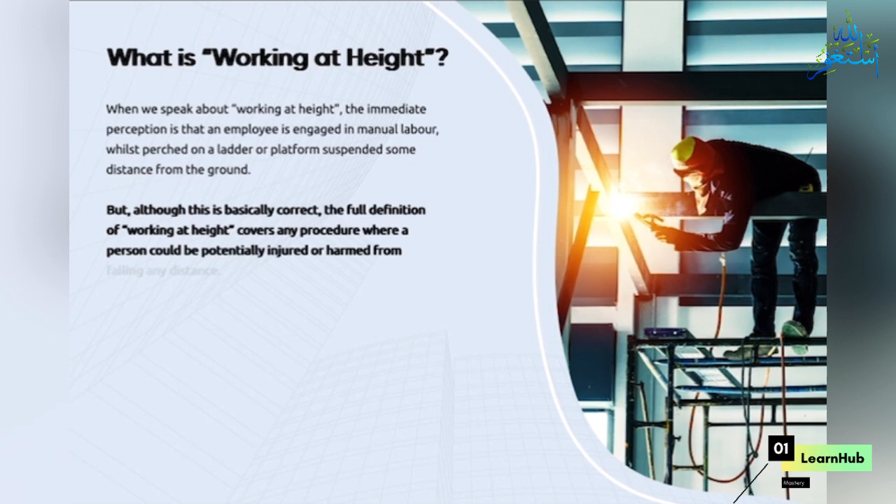What is working at height? When we speak about working at height, the immediate perception is that an employee is engaged in manual labour whilst perched on a ladder or platform suspended some distance from the ground.

But although this is basically correct, the full definition of working at height covers any procedure where a person could be potentially injured or harmed from falling any distance.

This can even apply to tasks set at ground or below ground level if there is sufficient distance for a body to fall and impact upon a hard surface.

Therefore, work in a large underground space can still be as dangerous to employees as tasks set outside high buildings or on roofing.

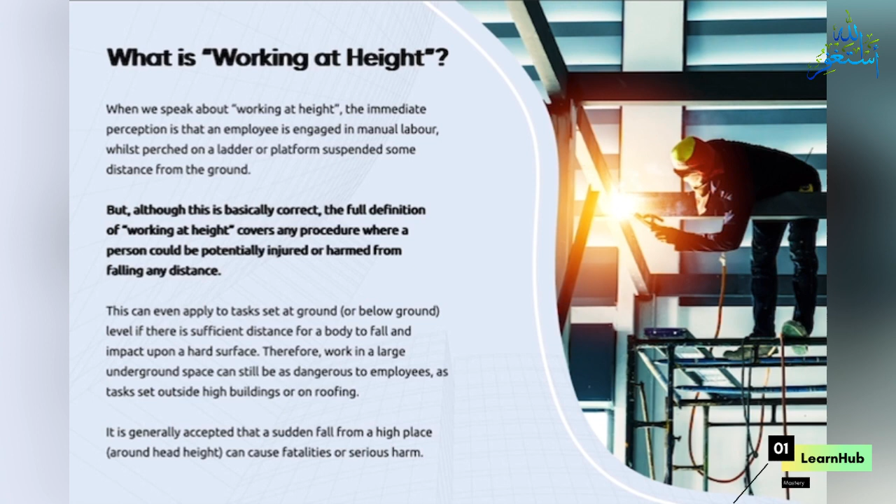It is generally accepted that a sudden fall from a high place around head height can cause fatalities or serious harm.

Examples of working at height.

There are plenty of traditional and non-traditional jobs that will entail working from a height. These will generally involve an individual performing manual tasks whilst positioned on trestles or scaffolding, flat roofing, ladders or cherry pickers, formwork or temporary building constructions, ground level close to a pit or excavation, or at any level close to fragile material that may collapse.

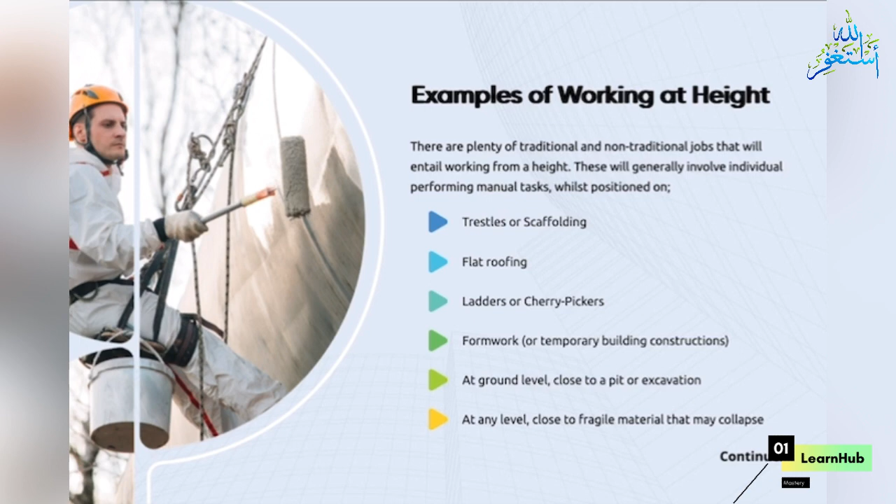Examples of working at height.

Trades and occupations may also include this kind of work, such as window cleaners, builders and construction workers, decorators and maintenance workers, shelf stackers at factories or shops, packers at warehouses, and firefighters.

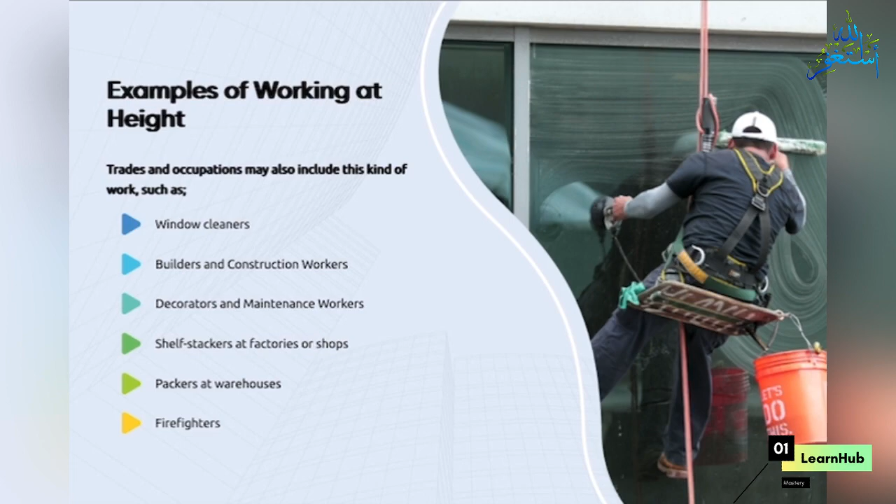Risks from working at height.

According to the most recent statistics from HSE, Health and Safety Executive, and RIDDOR, Reporting of Injuries, Diseases and Dangerous Occurrences Regulations, the most common cause for fatalities at the workplace in the UK is a fall from a height.

Over a quarter of fatal injuries to workers during the last 5 years were caused specifically by this type of accident, with 26% tragically dying due to injuries sustained. This is an average of 37 fatal injuries per year, and many of them were due to avoidable situations.

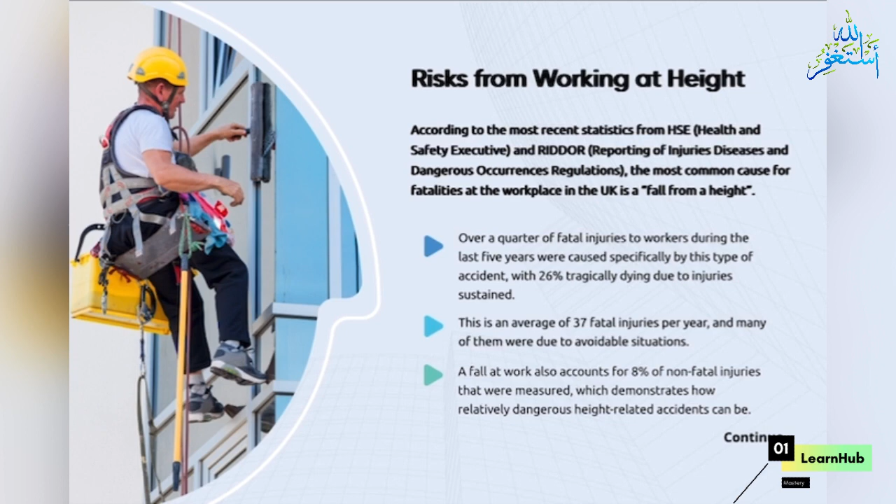A fall at work also accounts for 8% of non-fatal injuries that were measured, which demonstrates how relatively dangerous height-related accidents can be.

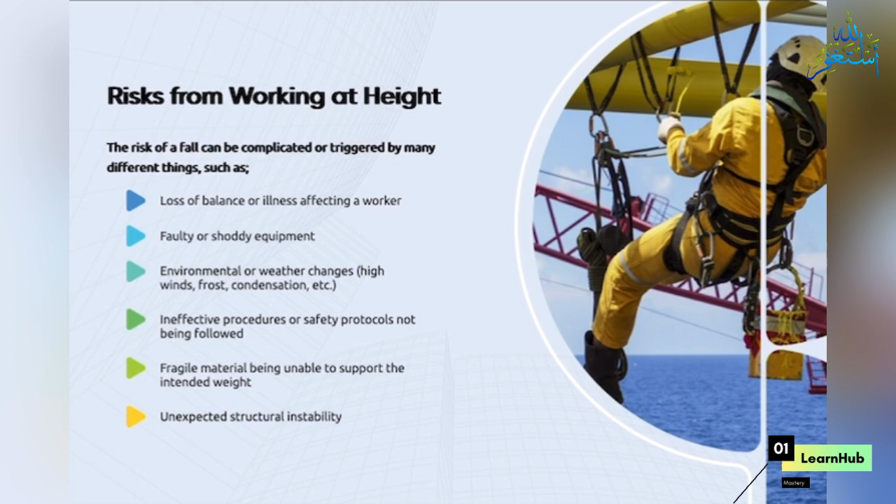The risk of a fall can be complicated or triggered by many different things, such as loss of balance or illness affecting a worker, faulty or shoddy equipment, environmental or weather changes like high winds, frost, condensation, etc., ineffective procedures or safety protocols not being followed, fragile material being unable to support the intended weight, and unexpected structural instability.

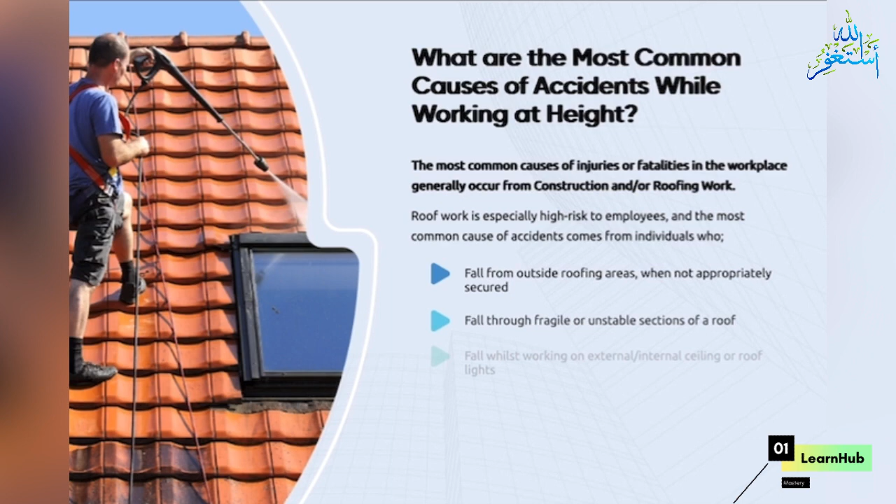What are the most common causes of accidents while working at height? The most common causes of injuries or fatalities in the workplace generally occur from construction and/or roofing work.

Roof work is especially high risk to employees, and the most common cause of accidents comes from individuals who fall from outside roofing areas when not appropriately secured, fall through fragile or unstable sections of a roof, or fall whilst working on external or internal ceiling or roof lights.

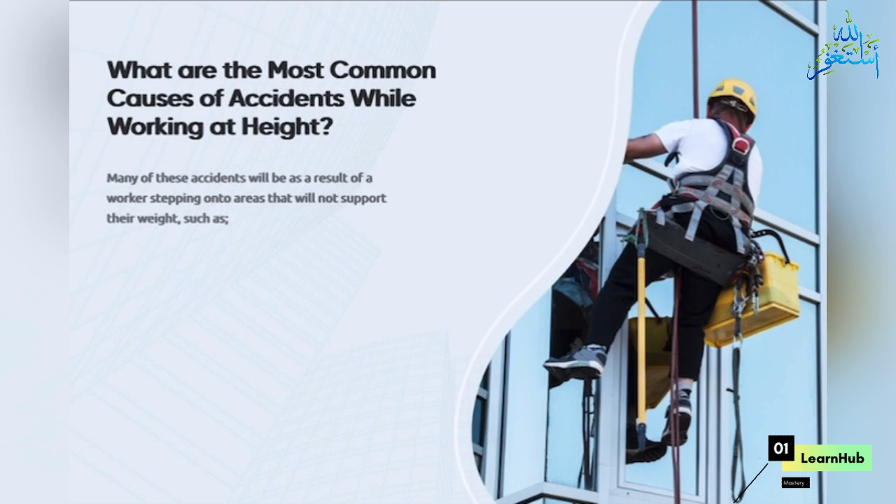What are the most common causes of accidents while working at height? Many of these accidents will be as a result of a worker stepping onto areas that will not support their weight, such as unsupported ceiling tiles, roof lights, rusted or worn metal sheets, glass panes, or rotted or splintered wooden panels.

Other high-risk jobs include gutter cleaning, window cleaning, and shelf stacking.

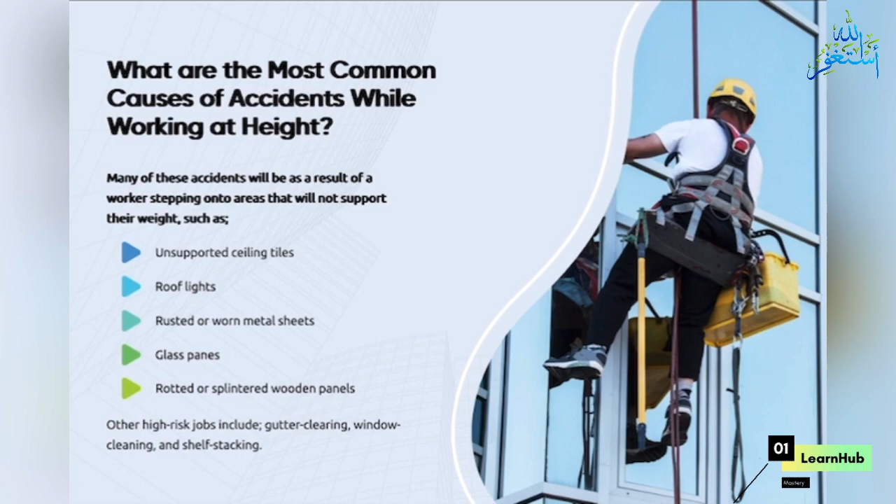What do you need to consider when making plans for working at height? When scheduled work is being organised at a high level from the ground, or at least involves the risk of a sudden fall, the following considerations should be taken into account.

In a warehouse, a shop, or a factory environment, you must make sure that all loose store materials and shelving are secured and sturdy. Where appropriate, structures and shelving must be proven to support the weight required.

Any emergency procedures, fire, evacuation, etc., must be planned for to ensure that any individuals are not placed at extra risk or isolated during any unforeseen incidents.

If the work is taking place outdoors, the weather forecast should be consistently checked, and the work should be cancelled if extreme conditions are expected.

Any roofing or above-the-ground flooring should be checked every time to ensure it can support the individuals doing the work. Where there is a risk of falling objects, bricks, tiles, etc., workers must either be sheltered or take appropriate safety precautions, and ensure bystanders and/or the general public are aware of any work in the vicinity.

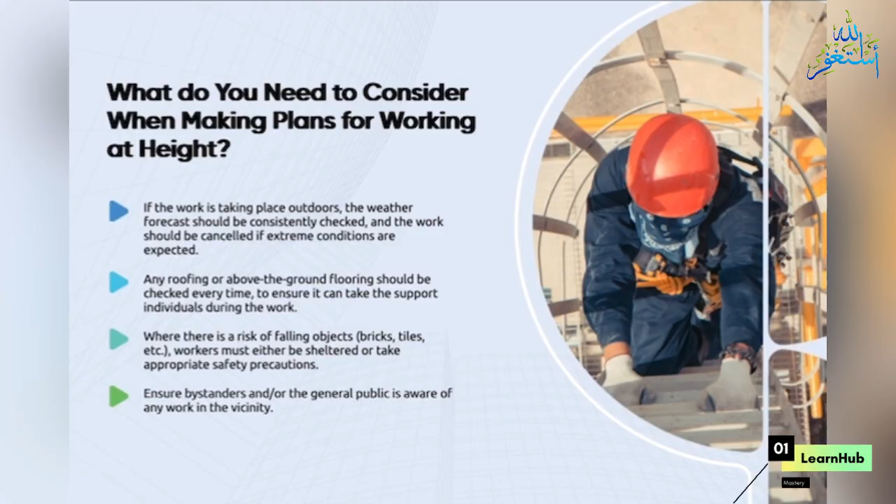The main UK legislation that covers all aspects of employees working at height is the Work at Height Regulations 2005, sometimes known as WAHR 2005.

The guidelines contained in WAHR are designed to protect all workers engaged in height-specific work, from roofing repairs to unloading stock from trucks or containers. The legislation relies on common sense and basic questions about the work in question.

Can any of the work be done from the ground? Is there reliable equipment that can be safely used to perform the work? Can anything be put in place to minimize the distance or risk of a potential fall?

If you are an employer or the PIC, person in charge of the work detail, you are responsible for these regulations being adhered to.

How do you comply with these regulations? In order to ensure that the legal obligations contained within WAHR are followed, all employers and PICs should ensure all work that can realistically be performed at ground level is done so.

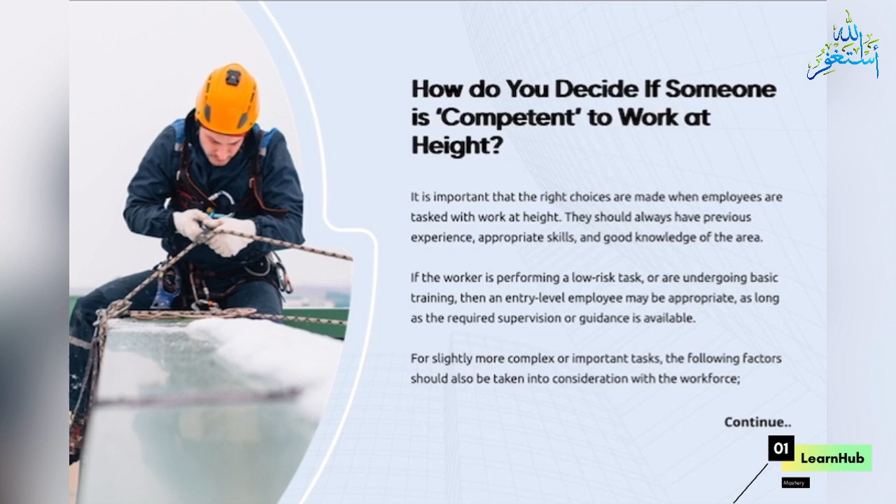For slightly more complex or important tasks, the following factors should also be taken into consideration with the workforce: full training for the equipment and work to be completed, and possibly certificated evidence of this.

Health and safety awareness to be confirmed by the workers involved. Risk assessments and work plans to be documented and agreed with workers.

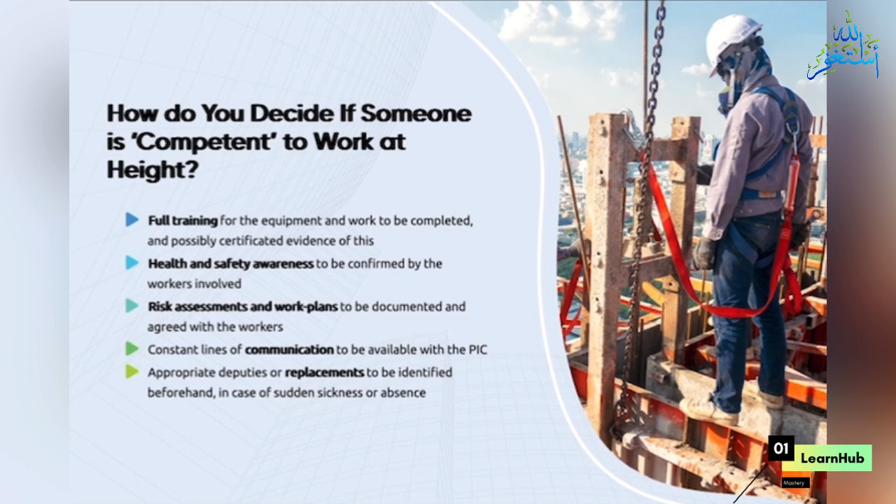Constant lines of communication to be available with the PIC. Appropriate deputies or replacements to be identified beforehand in case of sudden sickness or absence.

Duties. Both employees and employers hold duties and responsibilities where work at height is concerned.

Employer duties. If you are an employer or a property or business owner who controls work at height tasks, then you are legally obliged to follow all of the regulations contained in WAHR 2005.

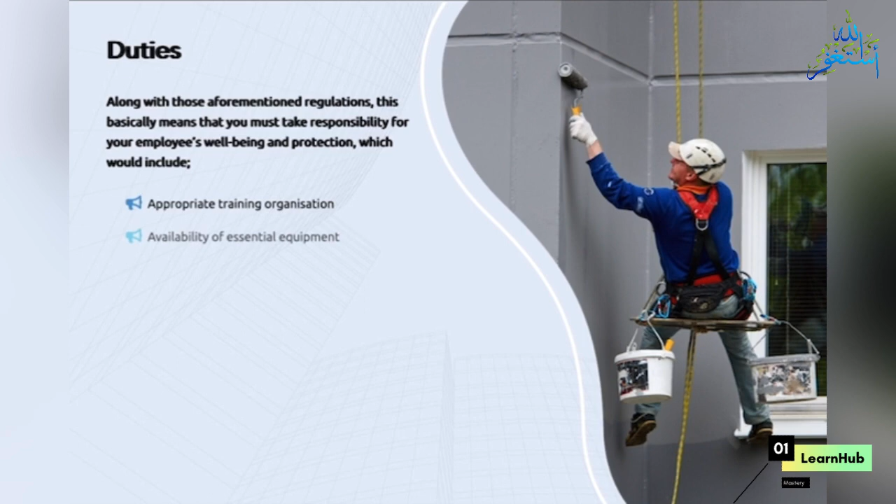See previous slides. Along with those aforementioned regulations, this basically means that you must take responsibility for your employees' well-being and protection, which would include appropriate training organization, availability of essential equipment, maintenance of said equipment.

Installation of health and safety protocols, inspection of work sites before and after tasks, identify and mitigate possible risks, permanent records of the work to be documented and stored. If possible, liaise with architects or building planners to prevent unnecessary height work.

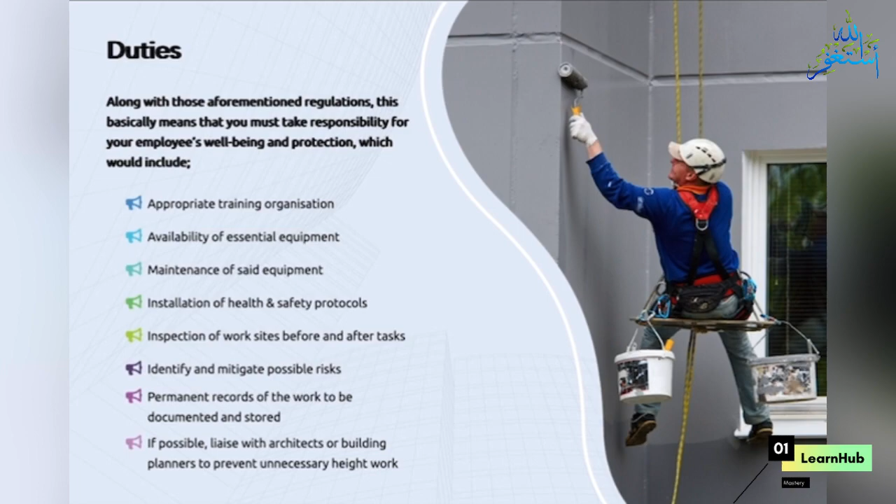Employee duties. Employees not only have a legal responsibility to comply with their employers, but also to take reasonable actions to ensure their own safety. To confirm that these responsibilities are upheld, all employees who take part in work at height should...

Report any safety concerns or perceived hazards to senior personnel and employers. Comply with the recommended use of provided equipment and safety devices unless they believe it will cause harm to themselves or others.

Perform personal research and inspection to ensure that they are happy with conditions prior to work taking place. Ensure that they are fully aware of all appropriate instructions, emergency procedures, and safety protocols.

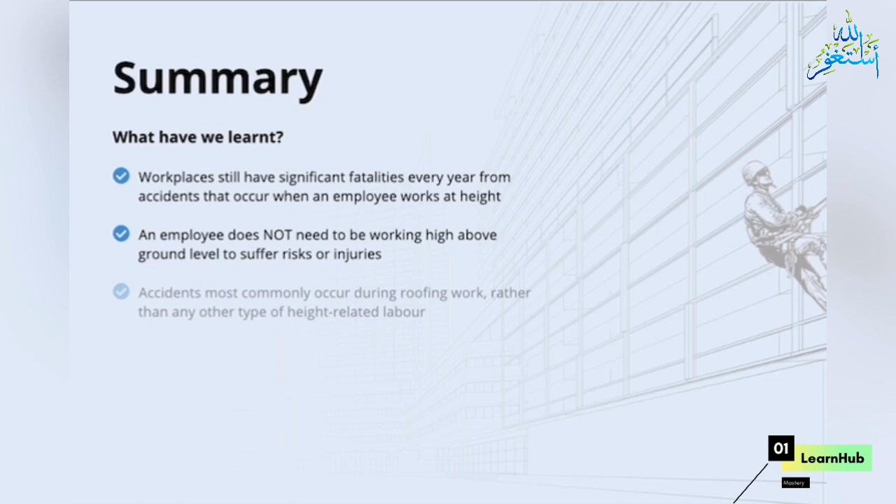Workplaces still have significant fatalities every year from accidents that occur when an employee works at height. An employee does not need to be working high above ground level to suffer risks or injuries. Accidents most commonly occur during roofing work, rather than any other type of height-related labour.

Legally binding UK regulations are in place to protect workers and staff from risks during height-related tasks. Responsibilities are held by both employees and employers in terms of general safety.